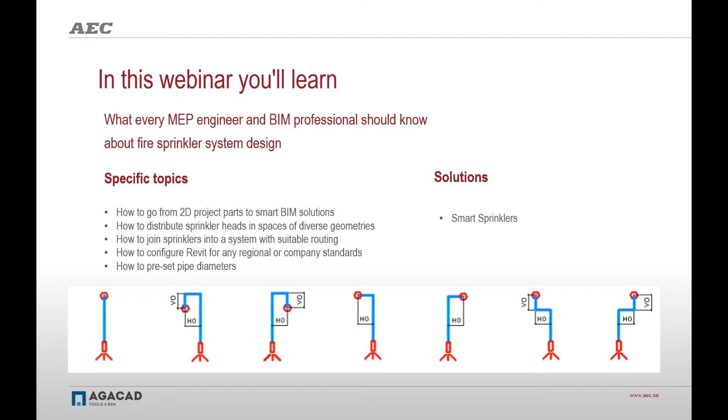Vi kan snabbt och enkelt distribuera sprinklerhuvuden i hela modellen och ha förinställda rördimensioner med mera. Programvaran heter Smart Sprinkler för MEP Engineering, som är en BIM-mjukvara för just sprinklersystem och integration i Revit.

Smart Sprinkler är en kraftfull lösning för våt- och torr brandskyddssystem. Vi kan göra förinställningar eller använda förinställda värden från leverantören för att distribuera sprinklerhuvuden i hela modellen och kalkylera rördimensioner och mycket mer.

Det här är en smart lösning för att snabbare få fram sprinklersystemet i hela modellen. Det är ett tilläggsverktyg till Revit som inte Revit har idag. Vi kan ha kontroll över modellen och göra kollisionskontroller. Det är snabbare att lägga in sprinklersystemen med hjälp av det här enkla Revit-verktyget. Sen har vi en mer uppdaterad och korrekt byggnadsmodell i framtiden.

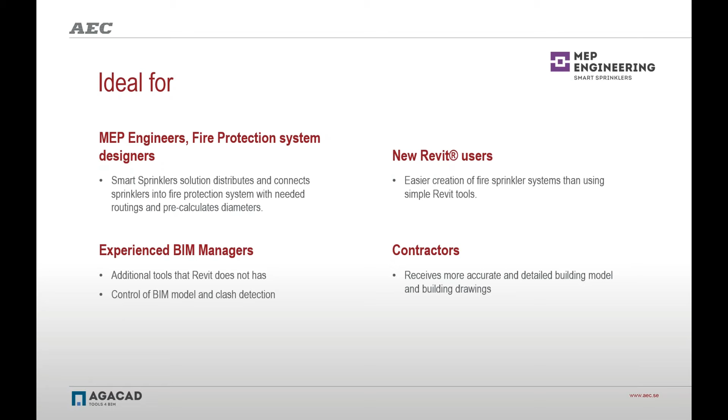Vi har också möjlighet att jobba i samarbete, så vi kan använda oss av inlänkade Revit-filer och kan skapa de här kollisionskontrollerna. Det är snabbt och enkelt att distribuera ut de här sprinklerhuvudena, och vi sparar massor med tid, upp mot 3 gånger tiden mot vanliga projekt.

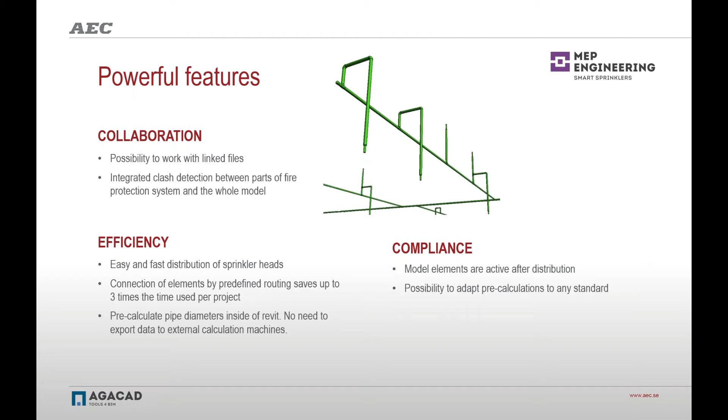Sen har vi en levande modell, så vad vi har i modellen ser vi verkligen vilka sprinklersystem vi har inladdade för framtida förvaltning.

Fördelar är ju smart modellering, snabbhet och effektivitet. Vi kan förhindra fel med hjälp av de här kollisionskontrollerna och lättare se var sprinklerhuvudena kommer i förhållande till andra objekt i vår byggnad. Vi kan spara inställningar för kommande projekt och just detta att vi kan även sätta ut

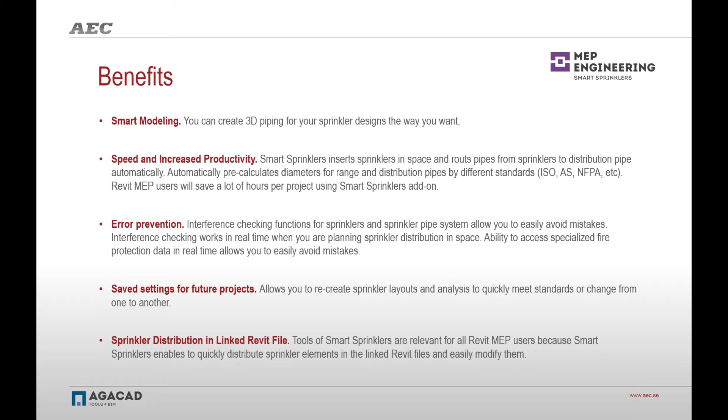sprinklers i inlänkade Revit-filer. Det är ett automatiskt system som vi får hjälp av. Vi får veta rördimensioner, vi har kollisionskontroll och sparar mycket tid. Och ett musklick och vi distribuerar hundratals element på en gång.

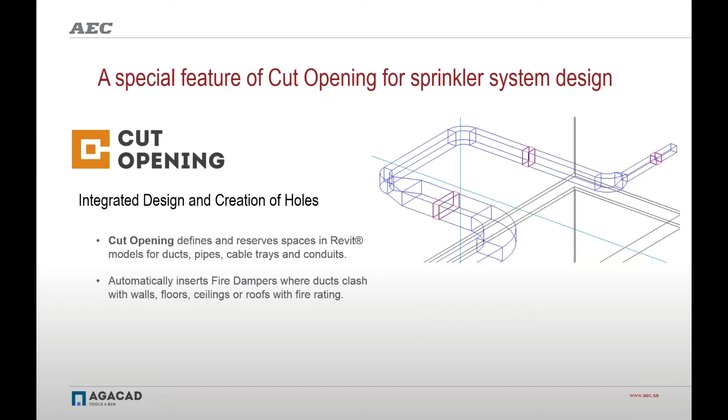Vi har en specialfunktion också, som AGACAD skapat, som heter Cut Opening, som kan definiera och skapa hål i Revit-modellen för just kanaler, rör, kabelstegar och annat, och även automatiskt sätta in brandspjäll. Så det är också en väldigt kraftfull applikation att använda.

Nu lämnar jag över till Jakobas som kommer presentera Smart Sprinklers på engelska.

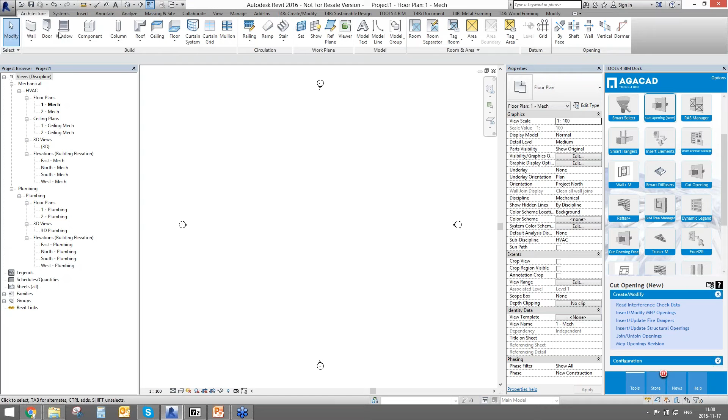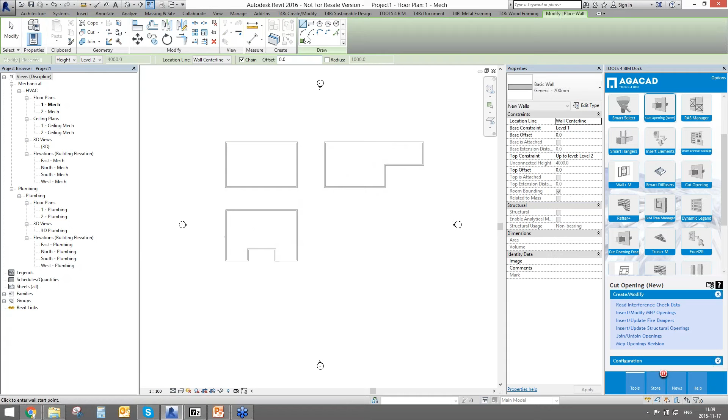At the very beginning I just want to create some different premises here in Revit that I will work with, so I will try to make different shapes of them. So I will have something like this, maybe this kind of the premise, and I will try to distribute my sprinkler heads into these premises with a smart sprinkler solution. For example, this one. So here you can see different shapes of the buildings, of the spaces or premises.

After I get the architectural model from the architect, I should distribute my spaces, or the other MEP engineer should distribute that. So I will turn them on to be visible firstly, to work with them a little bit. So then I have something inside of these premises, like spaces.

I have the possibility to distribute my sprinkler heads using the Smart Sprinkler solution that is placed on the Tools 4 BIM dock. It's divided into 3 parts: a virtual grid for distribution of elements, configurations to make your own configurations, and an insertion/modifying tab where you will be able to insert pipes and so on.

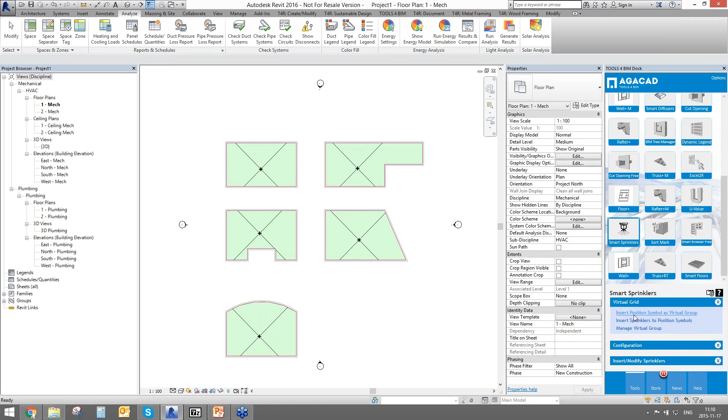At the very beginning I want to show how easily you can distribute elements into your model. So I'm clicking insert position symbol as virtual group, clicking on a space, and clicking on one of these walls to identify the x-axis of distribution. So I will pick, here we have 2 different generic symbols that stand for pendant position mark and upright position mark.

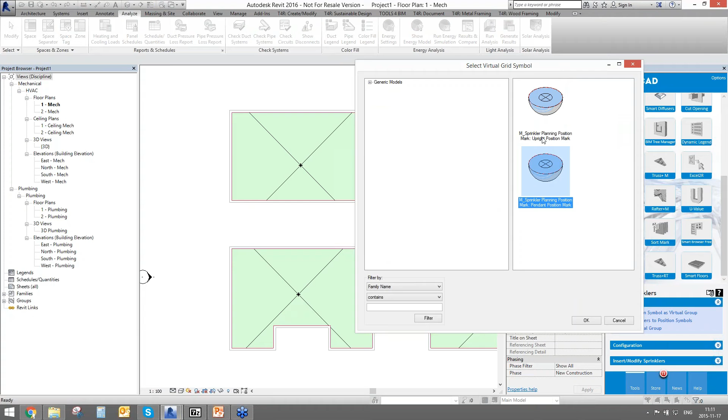So this is only the placement, like marks where the sprinkler should be placed. I will take this one, pendant position mark, and as you can see, I get Y and X axes here. So after I have this, I get a really simple dialog where I can distribute my sprinkler heads with an elevation and a distance in between elements.

It can automatically recalculate the distance in between elements on X and Y directions, as well as the number of elements on Y and X directions. As well, we have offsetting functionality and the minimum distance from wall functionality.

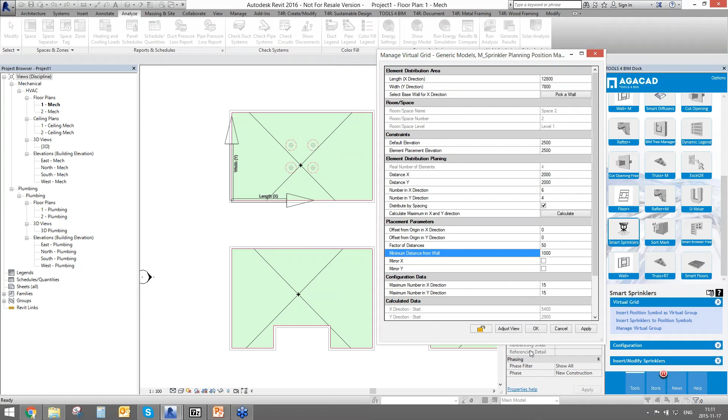After you set everything here, you will click apply and you will see that your sprinkler heads, just at this time only the position symbols, are distributed into the model really fast. So I could do that with different shapes of spaces.

So I will try to do the same with this space. I'm using the same pendant, using calculation, and as you can see, I distributed my elements here. If I take this one, let's try to insert the position symbols, but now I can, for example, take the other wall as the x-axis, and as you can see, it a little bit rotates my inner model, like my sprinklers.

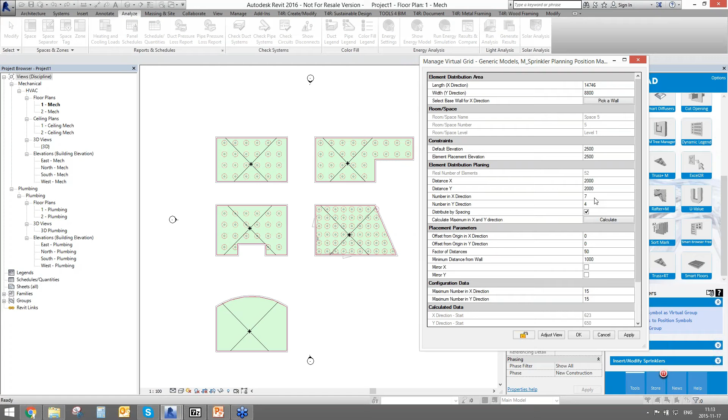As well, if I have something with an inclined element, I can click on a space and try to place the position symbols right here, calculate the distance if needed, change the distance of elements to 1.5 meters, and distribute it. If I change that back to 2 meters, I will recalculate, and as you can see, the number of elements on X and Y directions changed, so I can apply that to my model.

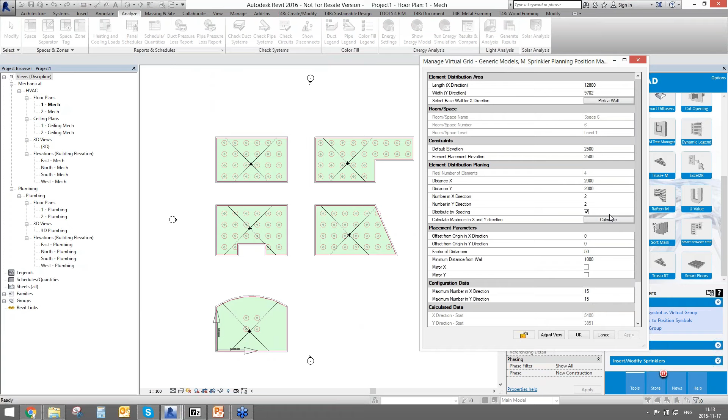If I go to this a little bit strange shape, but it is usually something like this, again I am able to use the same distribution feature to distribute my elements, calculate that, apply that, and I have something like this. So this is really nice, that you can distribute your elements in the way you need.

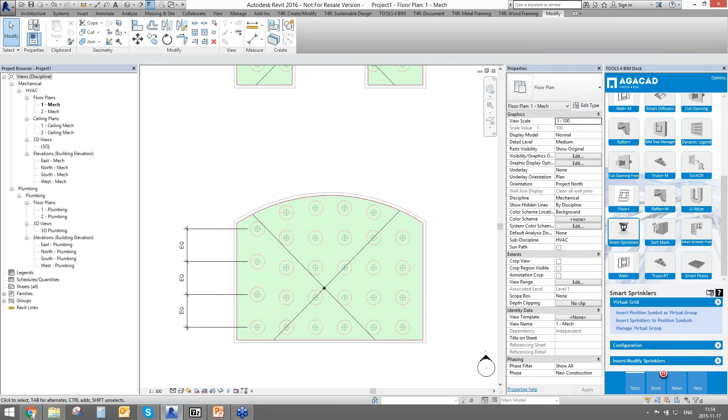As well, if you use Revit functionality, for example if I want to have this sprinkler head right here, I can use dimensioning, equaling, and I will have something like this. If I want these sprinklers a little bit lower, I can do that with Revit's simple functionality. Again, I can do the same as I showed with the first line of sprinklers, equaling here, and as well I want to align this sprinkler head to this and make it equal to these elements as well. So I will delete that.

Just with a light hand.

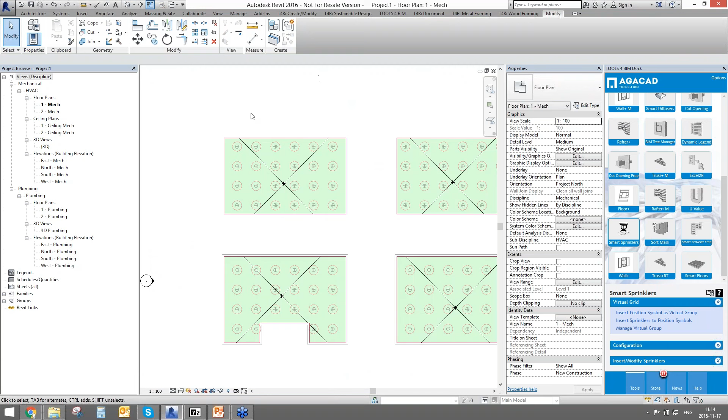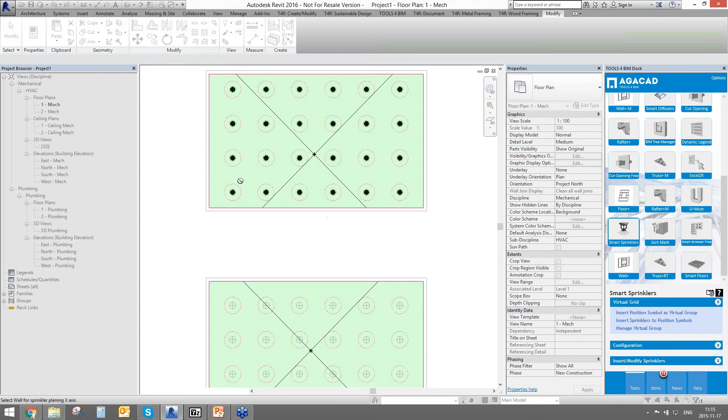So I have distributed my sprinkler heads into the model. It's not the sprinkler heads basically, it is the generic models, just the position marks. After I distributed these elements, I can take one of these and ask to insert sprinkler to position symbol. So I have simple Revit families placed in my case here. I will take pendant sprinkler, and as you can see, I distributed everything into my project. If needed, I can insert the position symbols not only like a pendant or only like an upright, but I can do that for them both.

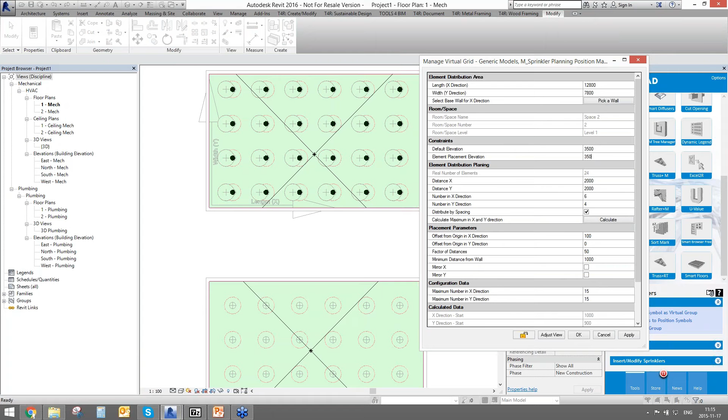I can calculate, I can do the offsetting, for example. Like this, I can change the elevation of it, and I am able now to click OK and place position symbol for not the position but the real sprinkler for the pendant sprinklers. So as you can see, I distributed the elements like this.

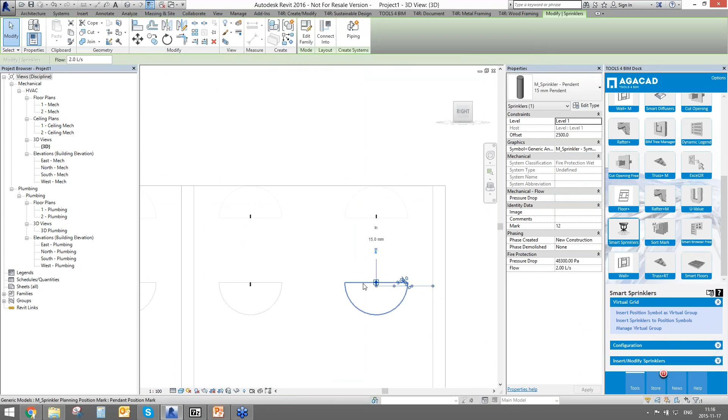So let me change the transparency of the walls so I could see everything. As you can see, I have distributed my pendant and upright sprinklers. So if I take it like this, let's check how that looks like. So I have sprinkler above and sprinkler like this. This is a really nice distribution of my sprinklers.

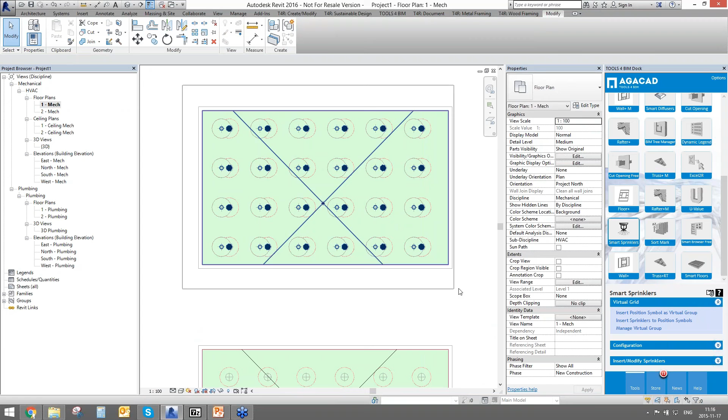So if I go back to my project and want to connect all these elements into one system, I am using the simple Revit functionalities to make piping in between them. So I'm creating the new system that is wet, for example wet 1, and I'm connecting all these sprinkler heads into one system that is named that one, and I will be able to calculate the volume of my system and so on.

So imagine that somewhere here I have the distribution pipe. The distribution pipe that will feed all my sprinkler heads just like this, or if I have it here just passing by one of these premises. So I want to connect all my sprinkler heads with this pipe and just use the range pipes and the sprinkler pipes to be connected to this distribution pipe.

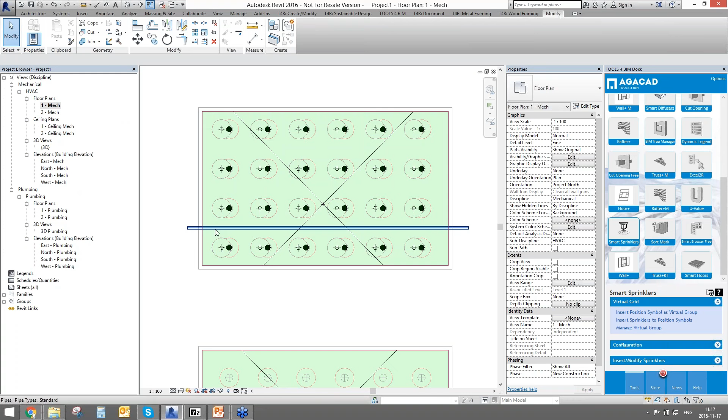So let's try to create new pipe types. Like I have standard, so I will duplicate it and duplicate it one more time. I will rename, for example, this will be a sprinkler pipe. Let's make this one to be range pipe, and this one to be, for example, distribution pipe. So I have 3 different pipe types, and I will try to make this pipe type as a distribution. This is the main, and all my branches should be range pipe. Only the little pipes going from the sprinkler to the range will be named as a sprinkler pipe.

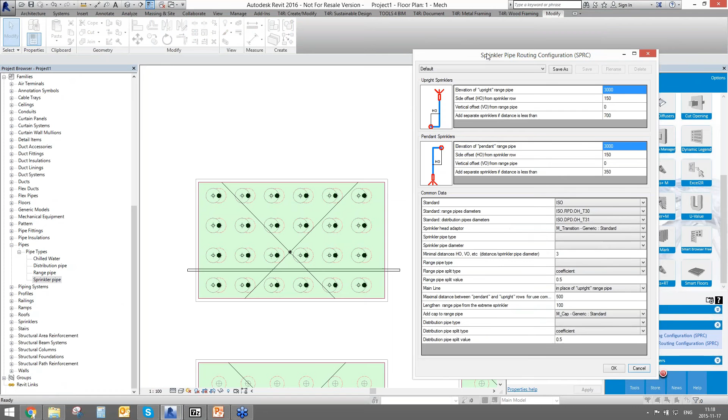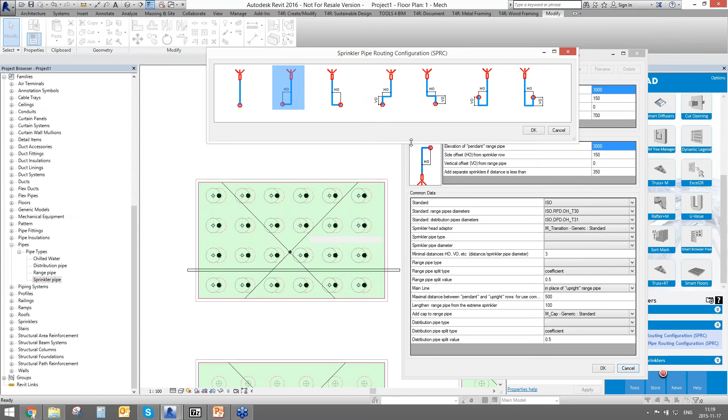So after I have different pipe types, I can go to the Smart Sprinkler solution and make some new configurations for it. I'm going to the sprinkler pipe routing configuration. Here I have different possibilities to make different configurations. Firstly, I can choose how my sprinkler should be connected. So this is the most popular sprinkler head connection possibilities. I will take the simplest one right now, and we'll use something like this one maybe for the pendant. So I have 2 different possibilities for upright and for the pendant sprinklers.

After, if I go to the common data, I will see that I have some kind of standards that stand for pipe diameter calculation. I will speak about it a little bit later. As well, I have to choose the sprinkler head adapters from my project. I have to choose the pipe type. So the sprinkler pipe type will be sprinkler pipe type, the range pipe type will be range pipe type, and distribution will be distribution pipe type.

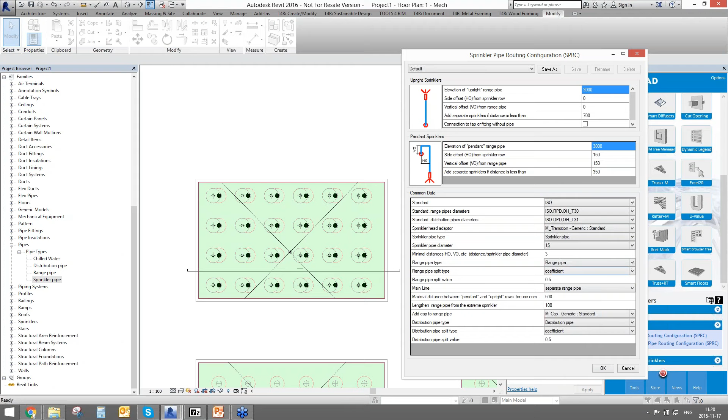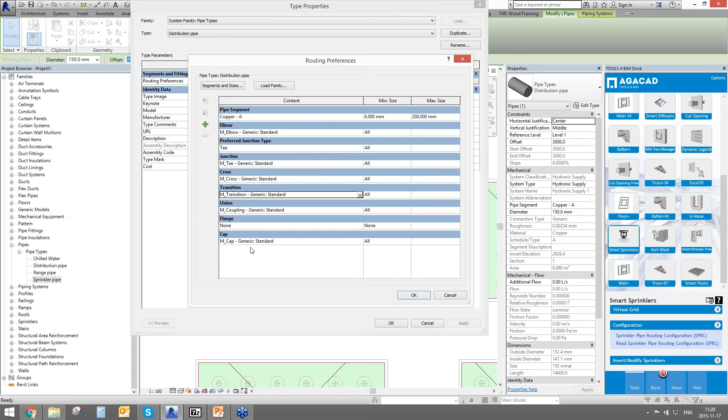As well, we have different features here inside for splitting the elements when we have the diameter change, and so on. And we have really nice mainline features. So firstly, I will show everything as separate range pipes, and let's say that all the routing configurations are set. Let's make this pipe to be at 3 meters, and please remember that all the routing preferences come from here. Like you will get all the pipe segments, elbows, T's, crosses, transition, unions and caps from here, and only the shape of your connections you will get from here.

So it automatically will create something like this. After you set all your configurations, you can click on Insert Modify Sprinklers tab and connect sprinklers to distribution pipe. So I will take the sprinkler and the pipe in a space.

You can see that all the fittings, all the elements are inserted into the model instantly. So let's check that from the 3D view.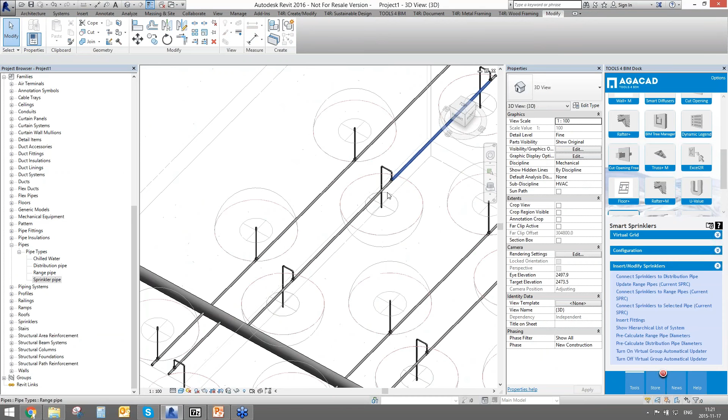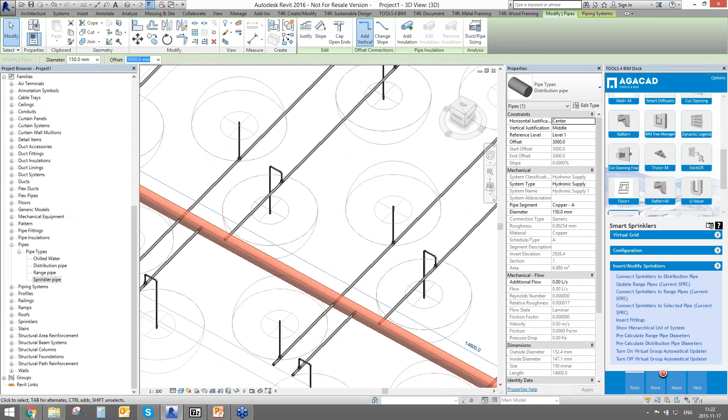I have two different pipes, one pipe that is going for upright sprinklers and one pipe that is going down to the pendant sprinklers. I have a little pipe over there that is the lengthened pipe, as well I have a cap, and so on. If it's needed, I can insert the fittings over there using the Smart Sprinkler solution.

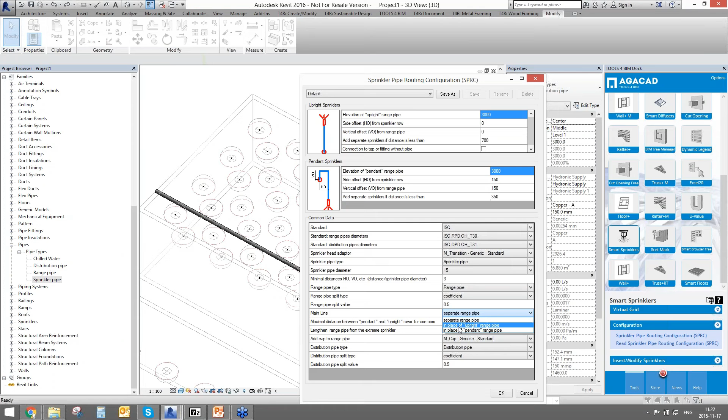Let's try to do the other functionality. I will go back to the configurations and change the main line. That means I had separate range pipes for upright or for pendant sprinklers, but right now I want to connect them both into the place of the upright range pipe. I'm going to insert and connect sprinklers to the pipe.

As you can see, it is distributing the elements through all your space, and it is creating all needed elements. It is placing all needed elements into the model really fast. This is really nice, and you can see that we have everything. We have sprinklers distributed, we have the sprinkler pipe here as well. We have a sprinkler pipe here. Here we have the range pipe that is connected to the distribution pipe.

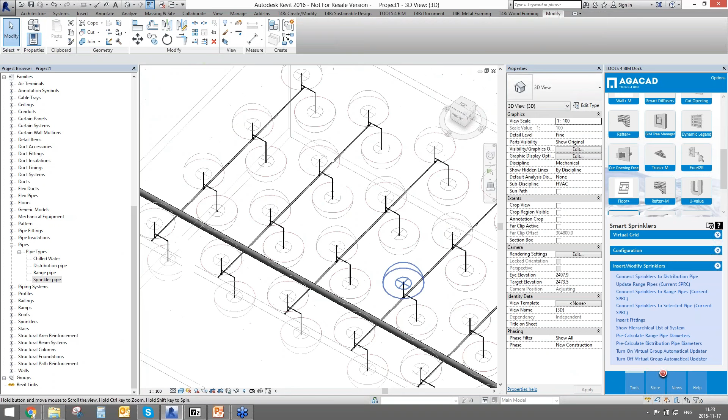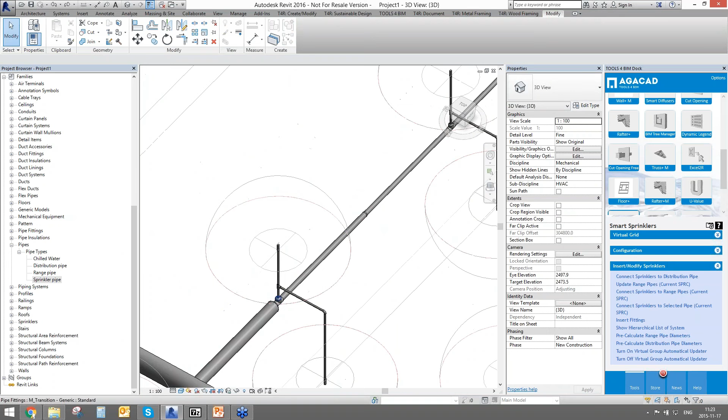As you can see, the pipe diameters are pre-calculated. So if I have several sprinklers connected, I have 25 diameter. If I have two more sprinklers connected, I have 32 diameter. If I connect two more sprinklers, I have diameter of 40 millimeters. This is really nice, this solution can calculate the diameters of elements.

So how is it doing this? It's taking the information from the standards, from the standard that you pick over there, like we have ISO standard, we have Australian standard, and we have as well NFPA standard, that stands for America. We can choose the standard for range pipe diameters and distribution pipe diameters.

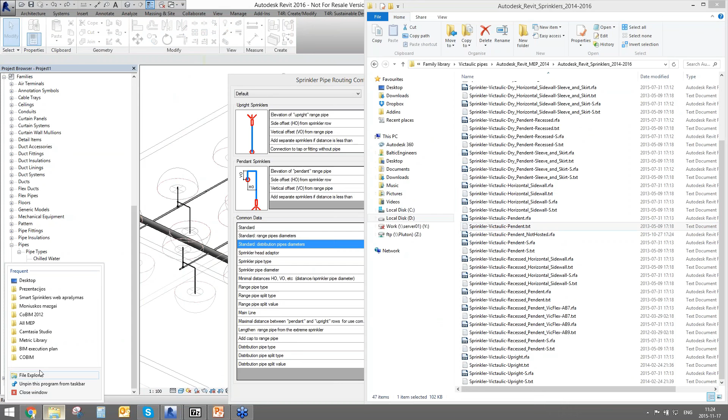How does it look like? I will open it really fast. Okay, Smart Sprinklers, and we have here. As you can see, this is only a text file, like something like the lookup table, not something like that, but it's kind of the same as a lookup table.

If you could see here, you will find that if I connect 3 elements, I will get the pipe diameter of 25 millimeters. If I connect the 4th element, I will get 32. If I have 6, I will get 40. If I have 9, I will have 50. So basically that looks like this.

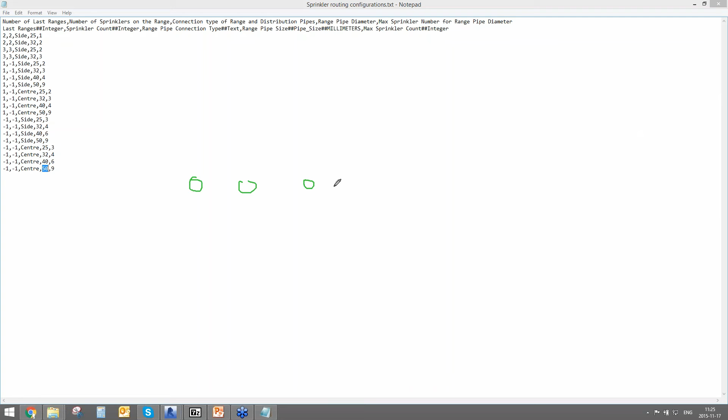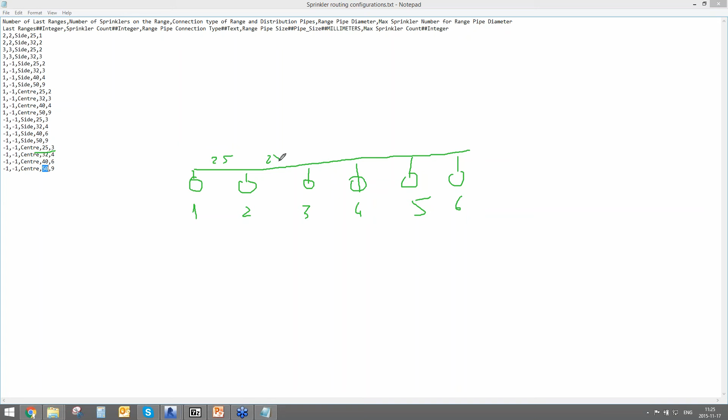I have several elements connected. Our solution is calculating 1, 2, 3, 4, 5, 6. So I have the pipeline over there, and I have connections like this, for example. If I have 3 sprinklers from here, 1, 2, 3, I will feed them with a 25 diameter, and I will have here something like a diameter change. And here I will have a bigger one, the 32, and here I will get the change again, and I will feed that the 40.

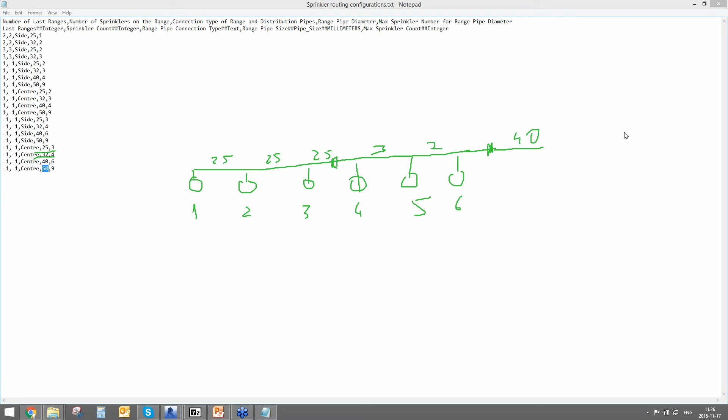So this is the idea of how our smart sprinklers are choosing the diameter for your pipes. This is a really nice solution, and if it's needed, you will be able to change all these values. If it's needed, you can adapt that to your company's needs or adapt this to your country standards. This is really nice, this is how we have calculated the diameters.

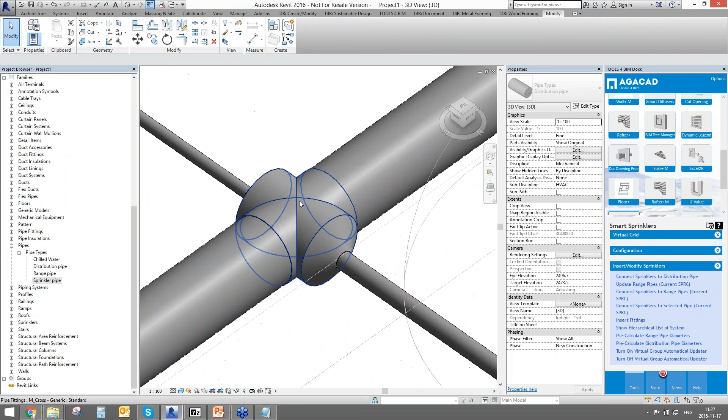After the distribution and pre-calculating the diameters, I can ask my solution. As you can see, I do not have fittings over there. I can ask my solution to insert fittings into this pipe. It will split my pipe and it will insert elements like the T's or crosses into the places where we have clashes over there.

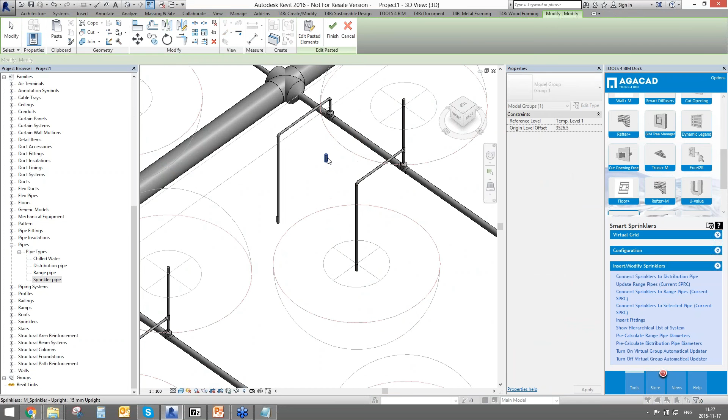As well, if it's needed, we can just simply copy all the stuff and connect sprinklers to the range pipes, just like this. I will copy this one somewhere here. I can connect the sprinklers to a selected pipe, like to any pipe. Let's check what's going on.

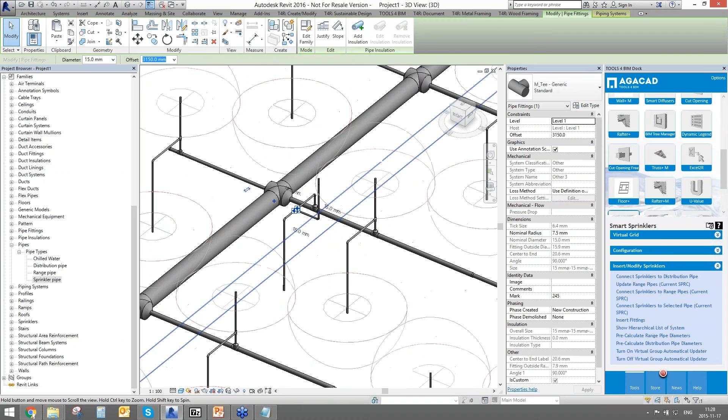Okay, I have the sprinkler over there. Let's move it here, and I will try to connect it to this pipe. So as you can see, I have connected my sprinklers, and after this, if it's needed, we can do pre-calculation of range pipes and the distribution pipes. So let's do that for this pipe.

And again, as you can see, we have one diameter over there. It's like 50, and on this way we have 65 diameter. So it pre-calculated the diameter of our feeding pipe, like the distribution pipe, in accordance to the number of connected sprinklers in this model.

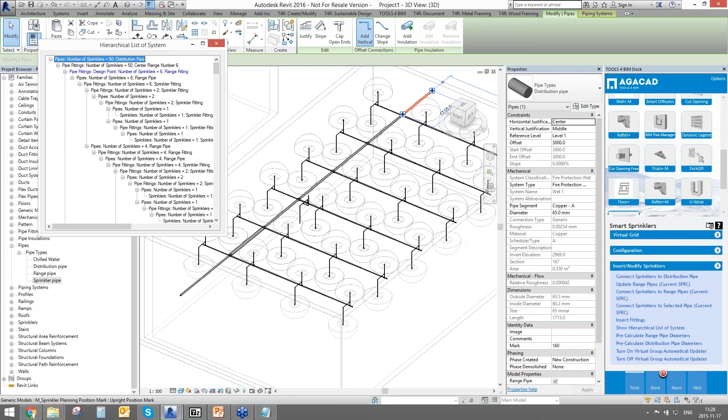So if I use show hierarchical list, I will get the information how my sprinklers are connected. I will get all the elements going from first element to the second, third, and so on. So I have all the parts from my system listed in such a tree. Sometimes it is really nice that you can find your element not going through the model, but you can go through the tree that is placed here.

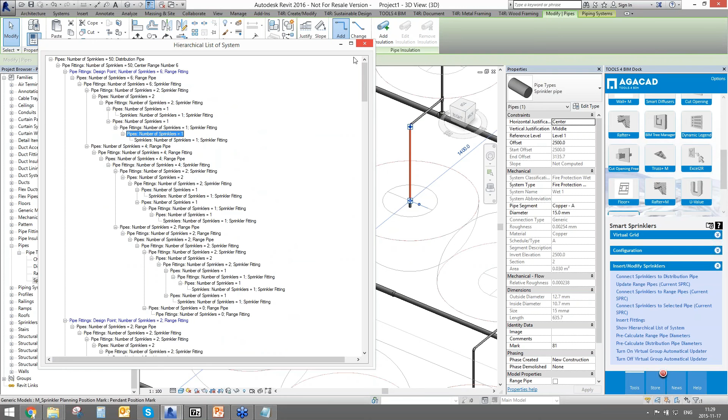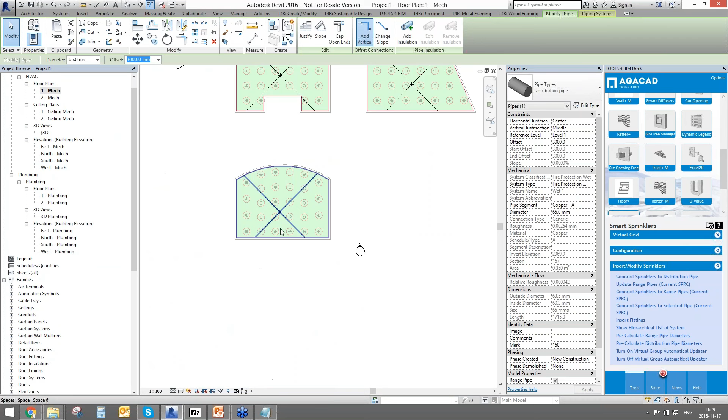As well, we have the functionality to work not only with the regular families, but with some new kind of families. So just 1 hour ago, I tried to find some families on the network. I found Autodesk Revit MEP Victaulic families. So here you can find all the families. I just downloaded them from the Victaulic web page, CAD files and software.

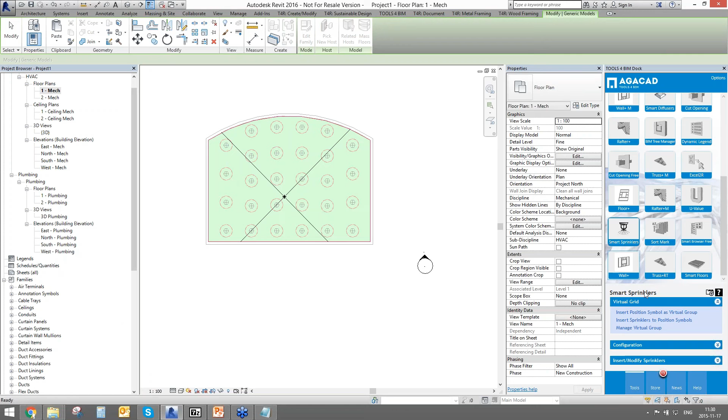So they have sprinklers, and they have the pipes like VicPress Victaulic pipes. So I will try to use those elements in my project. I have extracted that here. So I found the pendant sprinkler from Victaulic. I will drag and drop it to my project, and I will try to use it with not native Revit families, but the families that come from the manufacturer.

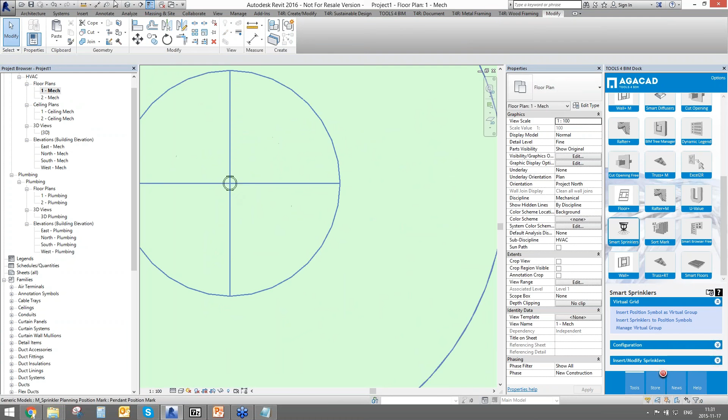So I'm going to insert position symbol. I am finding that Victaulic pendant element. I'm inserting that, and as you can see, I have distributed my elements through the model. Let's check that from the 3D view. I have distributed them. Anytime I can click on this, select all instances and delete them. So I will work only with the regular Revit families, not the position symbols.

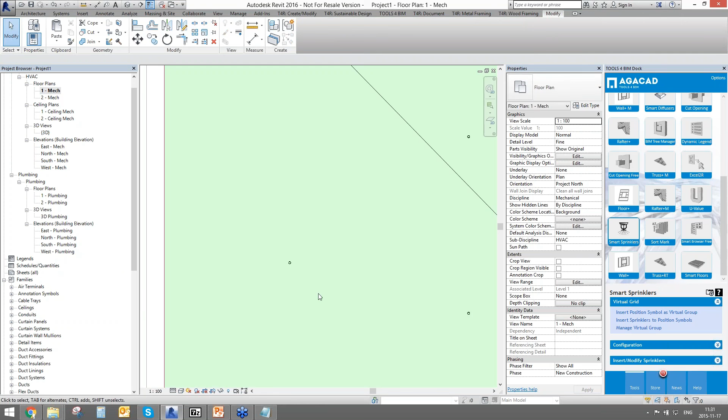So I'm going back to my project, and I will try to create a new pipe. We'll try to use the Victaulic Revit pressurized elements. So let's transfer those elements into the project. It will take some time to transfer, because they give us only the 2014 version, and I'm working on Revit 2016.

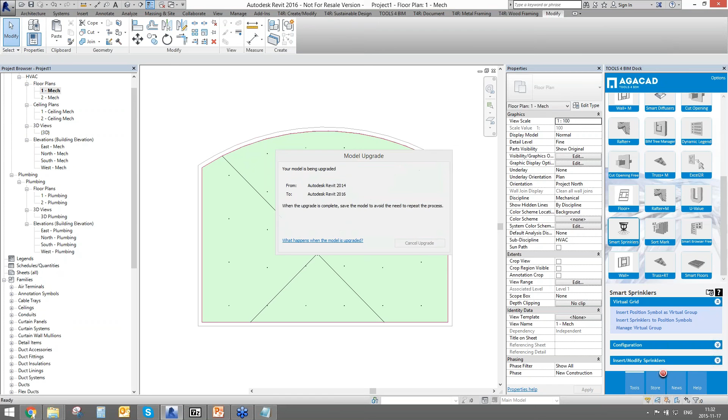As well, I want to mention that the Tools 4 BIM Dock ribbon is used only from the 2015 version. So if you have an older version of Revit, you still will be able to use the Smart Sprinkler solution from the ribbons on the top of Revit. So it looks like this. Anytime I can pass it back to the Tools 4 BIM Dock if it's needed. So this is really nice.

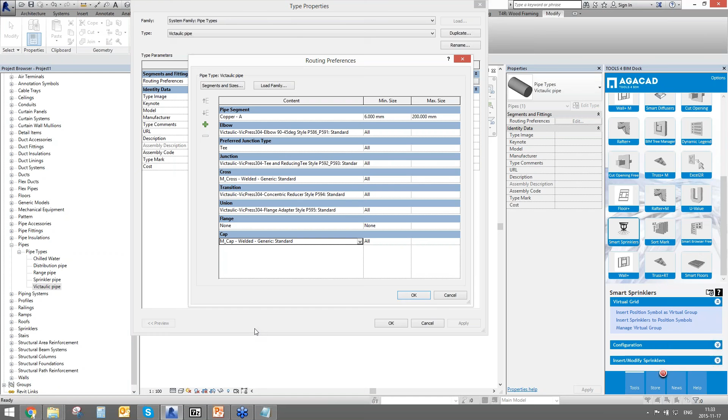So I just transferred the pipe elements. I will duplicate this, and I will rename it as Victaulic pipe. Okay, so I will go to the routing preferences, and I will choose some of those families that Victaulic are giving to us. Let's try welded, Victaulic flange, and welded, for example. So I took all these families in my routing preferences, so I'm clicking OK.

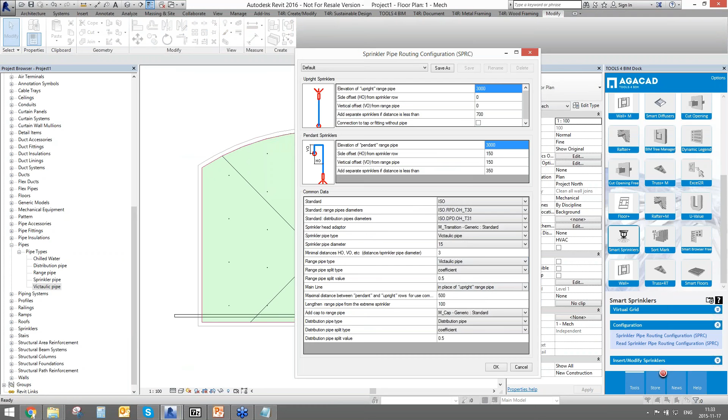I'm clicking again here. I'm drawing the pipe, using the Victaulic one, and I will place the distribution pipe over there at 3 meters height, for example. And after this I will go to the configurations, and I will change the sprinkler pipe type to Victaulic, as well the range pipe type and distribution pipe type to Victaulic. So I'm clicking OK. So all the configurations are set.

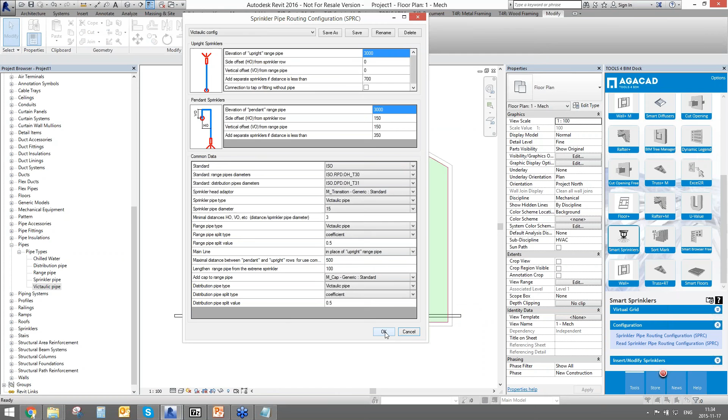So as you can see here, I have Victaulic. I can save that as Victaulic config, and anytime I will be able to find those configurations on my computer. As well, I will be able to send these configurations to my colleague if it's needed. So okay, the configurations are done, and I can go to connect sprinklers to the distribution pipe.

I distributed my pipes. I am now inserting the fittings, like the elbows, like tees, and so on, unions. So basically, to distribute such elements and to make this distribution, that could take for me about an hour, and now that takes for me only a minute or two. After this, I'm inserting the fittings over there into the pipe.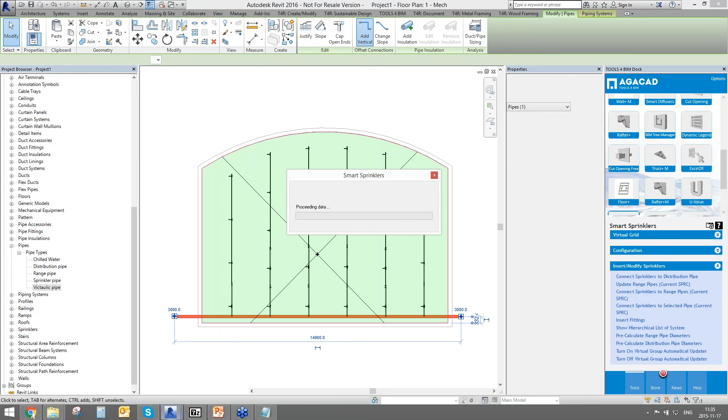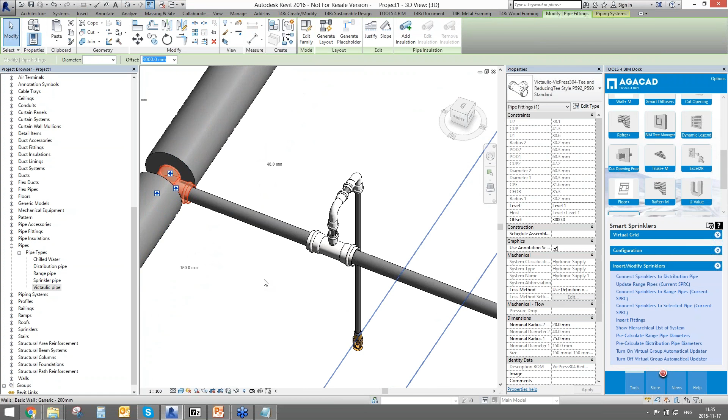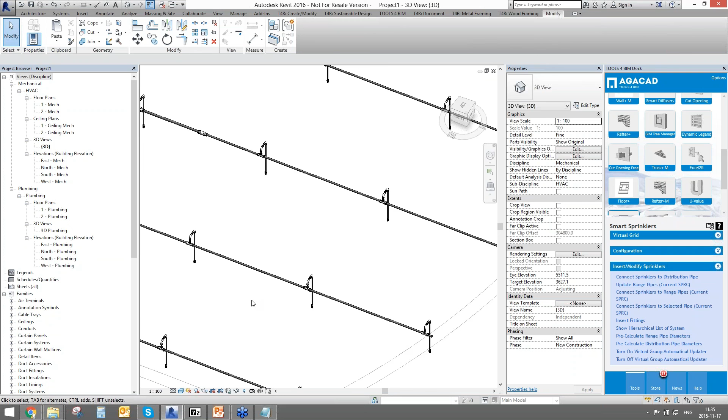Okay. Let's check how it looks from the 3D view. Okay, I do not have these lookup tables for my elements, but still you can see that I have all the catalog elements, really detailed families that come from the real manufacturer, and I can work with those families and the Smart Sprinkler solution. So I'm able to pre-calculate the distribution pipe.

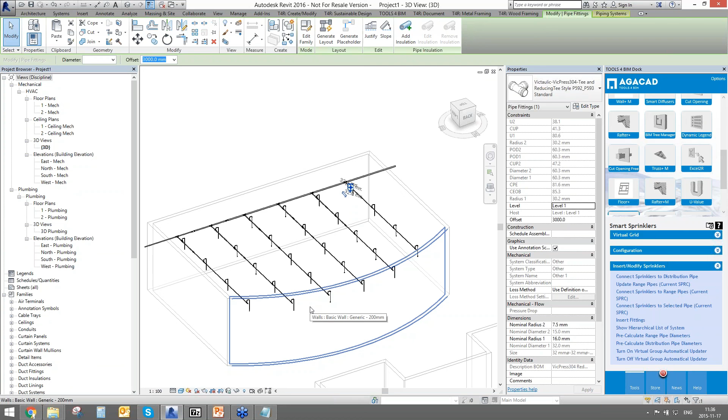Let's try what will happen. Okay, so now that looks better. So it inserted the elements. These families are really great because we have the connectors inside of them, so our pipe lengths are real, and this is a really nice case that you can work with the smart sprinklers and any families that you have. So this is a really nice feature.

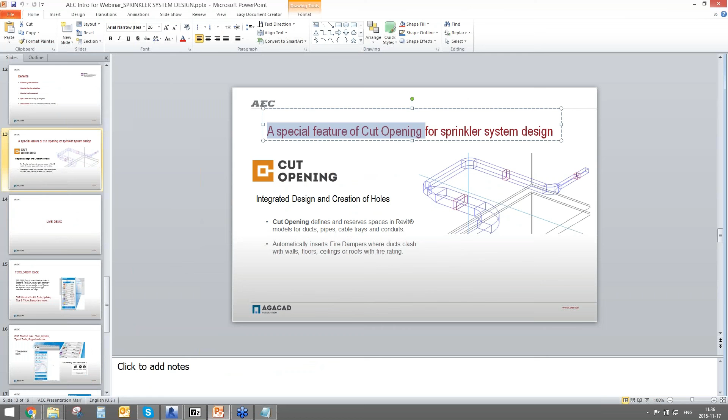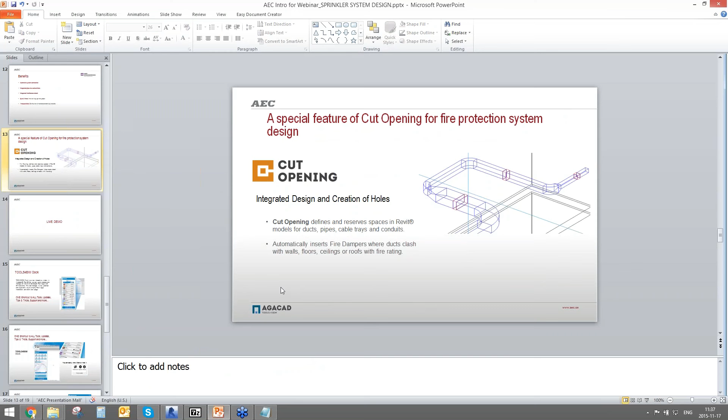As well, Maria said some words about the cut opening. So a special feature of cut opening for fire protection system design, basically. Cut opening could insert the fire dampers into the places where we say they are needed. So for example, if I go back here, I will use walls again. Let's try to do something like this. I will try to draw the duct, for example, like this.

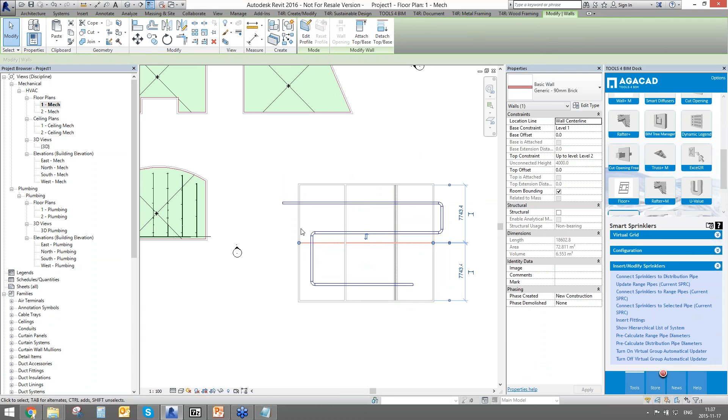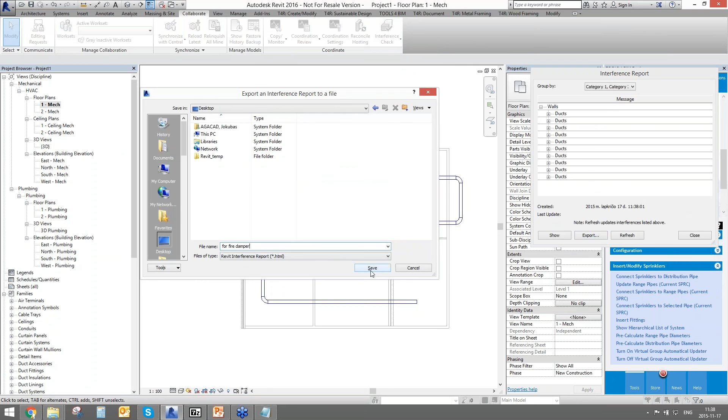Okay, so I will change some types of my elements. Generic, this one to be exterior, for example, and so on. So I have different walls here, and I have a duct. So I can go to the Collaborate tab. I'm going to run the interference check between walls and ducts. So I'm exporting all the stuff here for fire dampers. I'm saving that, and I'm going to find the cut opening menu.

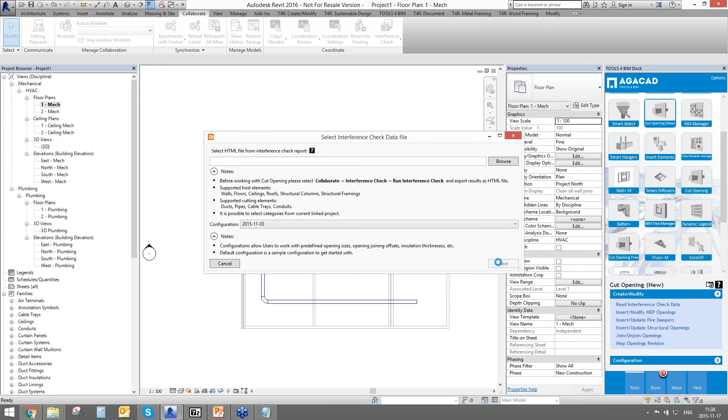So here you can find the possibility to insert and update fire dampers. So firstly, I can make holes for fire dampers. That will take just one minute or not more. Okay, and I will try to insert. Firstly, I will map host elements. So I will try to say to which walls I want to place the fire dampers. For example, I want to place it here and here and here. So I set some configurations.

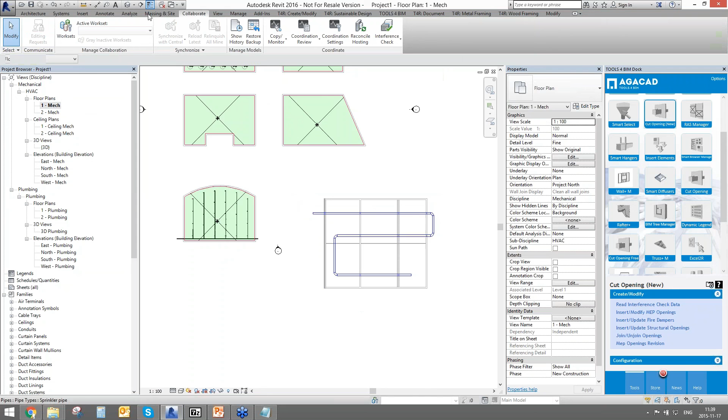Okay, I'm saving the XML file, XML for fire dampers. No, I don't want to work further. I'm going to insert MEP openings. I'm browsing the same file. I'm clicking next, and I'm inserting the openings first. So I have 10 elements to be inserted. Let's check how it looks.

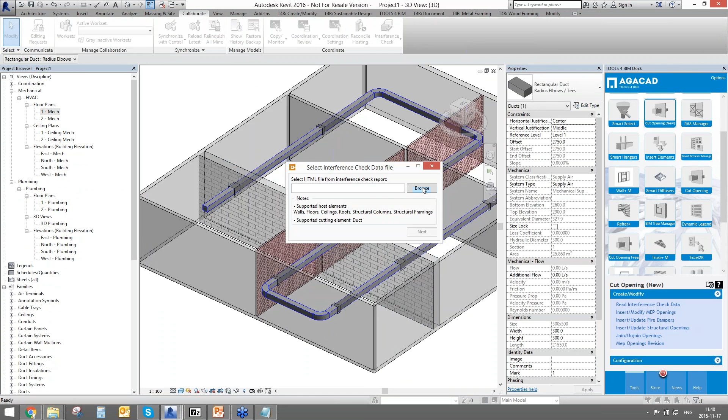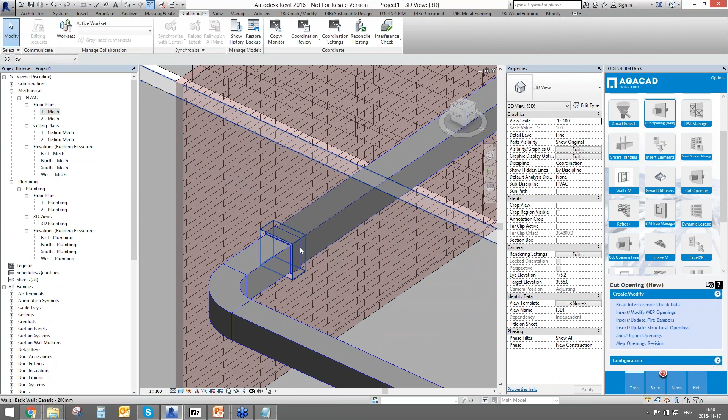So I will make it the color coordination view to make them easier to see. So I have the openings over there, and right now I will try to insert fire dampers into my model according to the same file. So I have no mapping. Okay, no mapping, so let's do this one. Okay, so I'm inserting the elements into the model. So it distributed not only the openings, but as you can see, it distributed the fire dampers just by a few clicks.

And here, because I did not map exterior brick on metal stud, the mapping was done only for these, and this one was left, so we do not have an element placed over there.

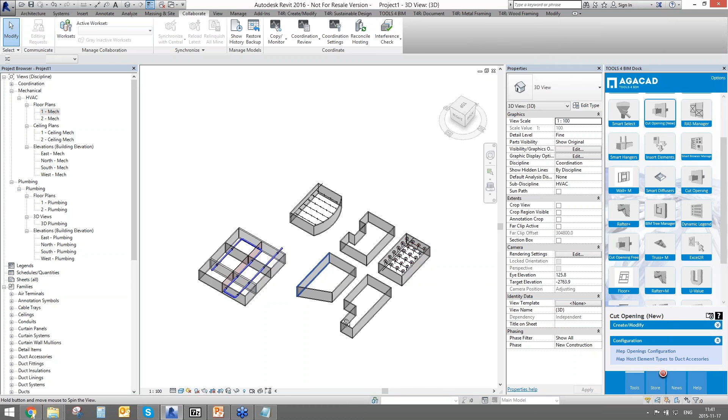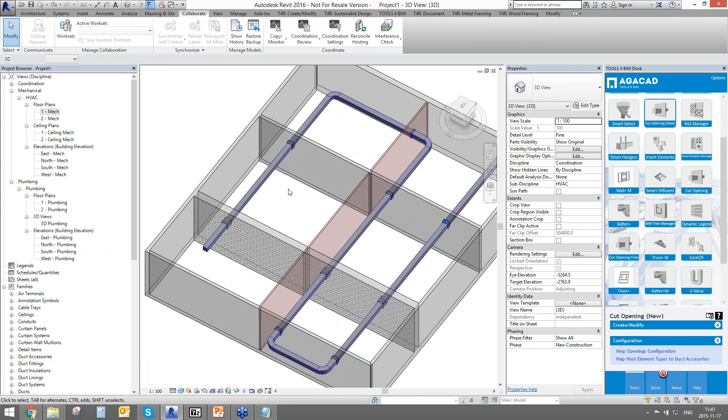So this is what AGACAD could suggest to you for fire protection system design in Revit. So this is sprinklers and distribution, routing and calculation of the diameter. As well, we can suggest the insertion of fire dampers not only into the walls but into the ceiling, roof, floor, beam, or wherever you need, where it clashes with the ducts. So that is all AGACAD could suggest for fire protection design.